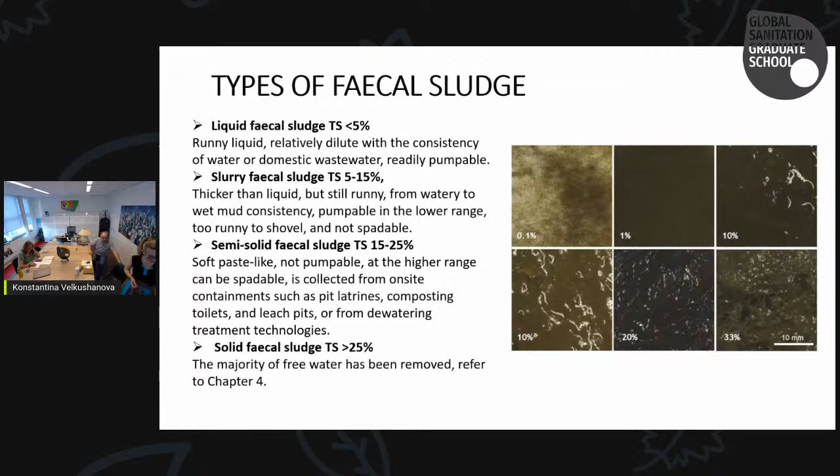We already discussed some factors influencing the characteristics of fecal sludge along the entire sanitation service chain. For example, the inputs going into the on-site sanitation influence the characteristics or composition of the fecal sludge that accumulates over time - we have excreta, anal cleansing materials, or miscellaneous materials like solid waste, additives, or other cover materials.

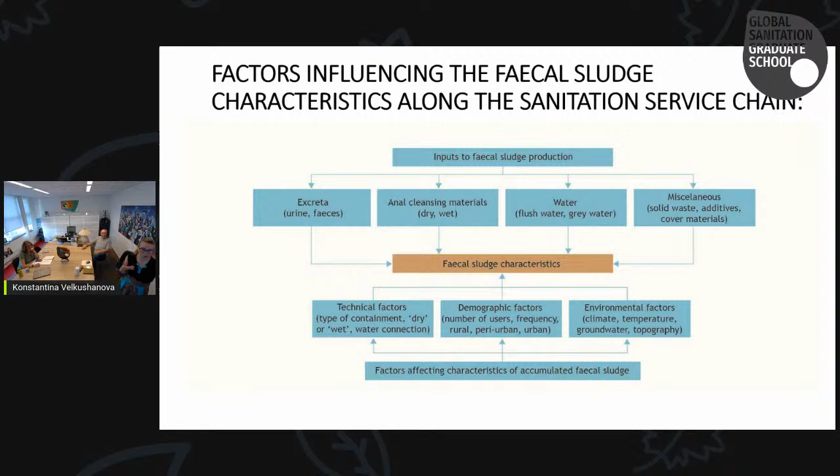Along with this, we have other factors influencing the characteristics, such as the type of containment - whether it's a dry or flushing system - the demographics, how many users use these systems, the frequency of use, and whether it's in a rural, peri-urban, or urban setting. And of course, we have environmental factors, which could be climate, temperature, groundwater, topography, or other related environmental factors.

We have dry pit latrines, wet pit latrines, community ablution blocks, urine diversion toilets, school toilets, or unimproved pits. The variation represents not only the type of on-site sanitation, but also the sampling points from different layers of the accumulated sludge. This shows how important it is to unify the methods we follow to characterize fecal sludge, because it's a highly heterogeneous material, unlike more homogeneous materials such as wastewater.

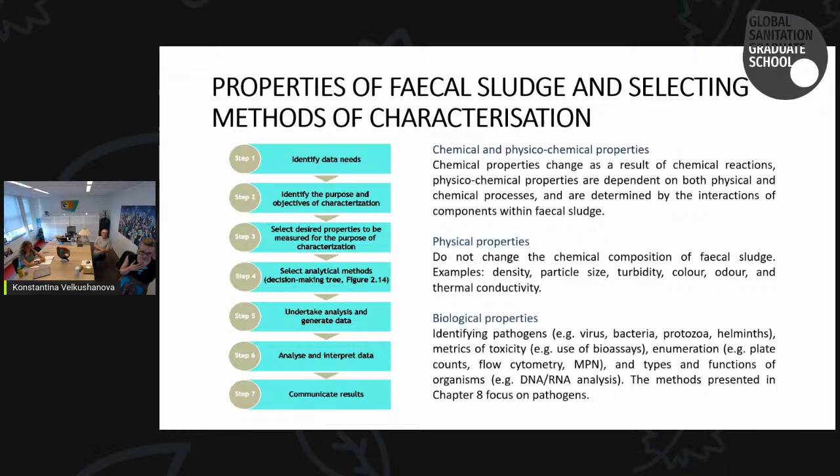In this book, we provided 3 main groups of properties for fecal sludge: chemical and physical-chemical properties, physical properties, and biological properties. In chapter 2, we included the setting up of laboratories for fecal sludge analysis, focusing on case studies from fecal sludge laboratories around the globe with different partners, covering personnel, training, availability of good facilities, types of samples, health and safety aspects, equipment, and reporting.

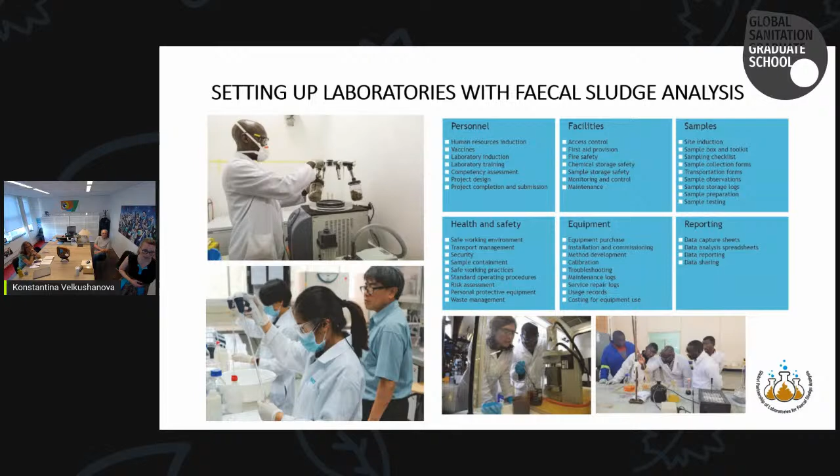Speaking of laboratories, I'll quickly go through chapter 8, which is the largest chapter and includes all the different methods we managed to summarize. There was a long list of authors and an even longer list of contributors and reviewers.

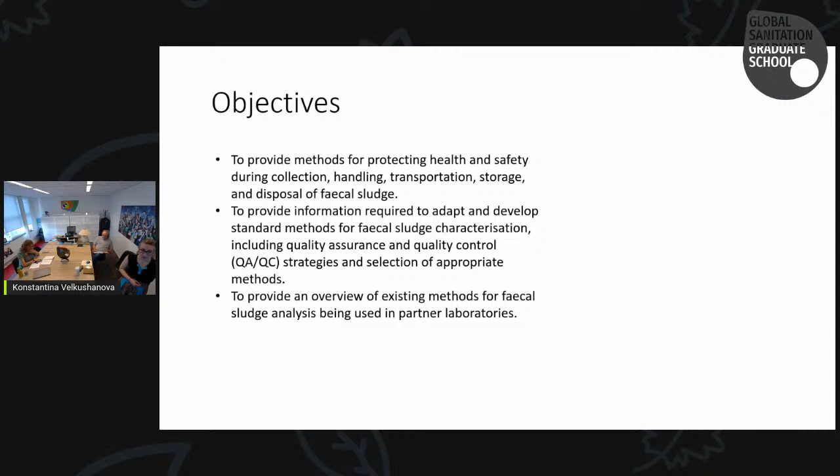The objectives of this chapter were to provide methods for protecting health and safety during collection, handling, transportation, storage, and disposal of fecal sludge; to provide information required to adapt and develop standard methods for fecal sludge characterization, including quality assurance and quality control strategies and selection of appropriate methods; and to provide an overview of existing methods for fecal sludge analysis used in partner laboratories.

The content in this chapter includes different aspects. I'll show you the methods included, but we also covered health and safety aspects, such as standard operating procedures, what personal protective equipment is needed, vaccinations and inoculations when working with fecal sludge in laboratories, clean and dirty working areas for preparation and analysis, and how to handle the fecal sludge.

We also have a quality assurance and quality control section, covering the chain of command, the importance of equipment maintenance and calibration, checking compliance, and the difference between accuracy and precision. We also address fecal sludge storage and preservation, how to safely dispose of samples and chemicals after analysis, and different sample preparation techniques depending on the type of fecal sludge.

For the methods, we currently have 49 included, distributed between the 3 groups already shown. These methods are modified from standard methods used in wastewater, water, and soil science, and the level of modification is indicated in each method with reference to the original. These methods are based on years of experience by the authors working with fecal sludge analysis in relevant laboratories, and the intention is to continuously upgrade and include new methods in future revisions of the book.

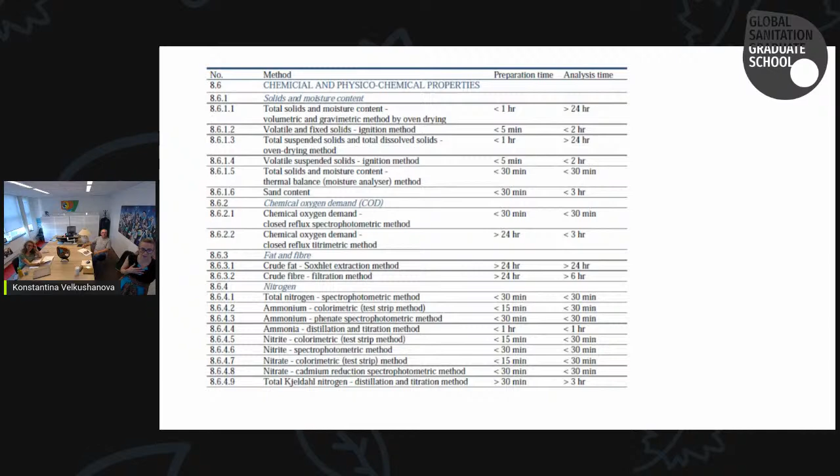This shows the different types of analysis methods included. The larger part is for chemical and physical-chemical properties: solids, chemical oxygen demand (COD), fat and fiber, nitrogen content, phosphorus, pH and electrical conductivity, elemental analysis, color, turbidity, settleability, and dewaterability. We also have some pathogen measurements.

Just to end, I want to say thank you to our site manager, Chris Buckley, who was a major contributor and dedicated his life to this field. So that's from me, thank you.

I would pass to Melinda. Thank you so much, Tina. I was really impressed that you could memorize all the chapters by heart. That shows true dedication, that's really fantastic.

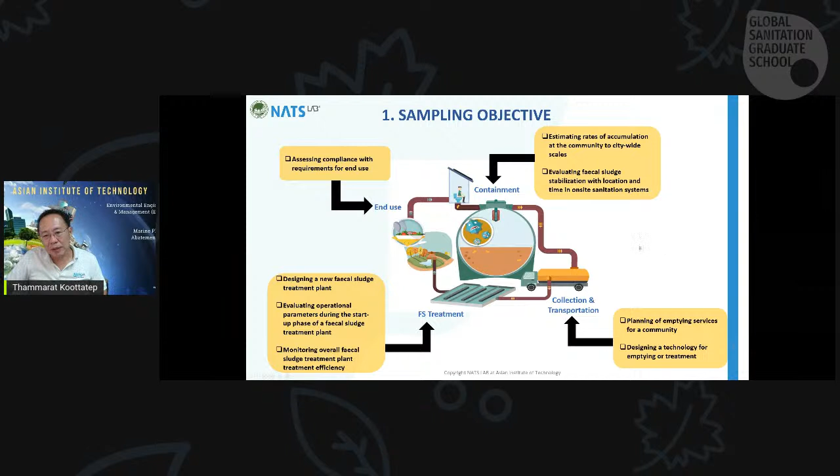We would like to define performance of the treatment system, evaluation of operational parameters, or monitoring of the treatment or reuse. So I think it's also very important to clearly define your objective first, before we get into the planning or the sampling program.

But of course, similar to water samples or environmental sampling techniques, grab samples can also be used for fecal sludge. As we know, the grab sample is a single sample or individual sample, which can provide a snapshot, because our system, starting from the container to the collection system to the treatment plant...

the characteristics could vary, as discussed by Tina earlier, so we need to prepare in advance how we should define things - whether we just want to know the snapshot or not, or whether we'd like to get representative samples along the time, along the flow, so that we can properly design the sampling plan.

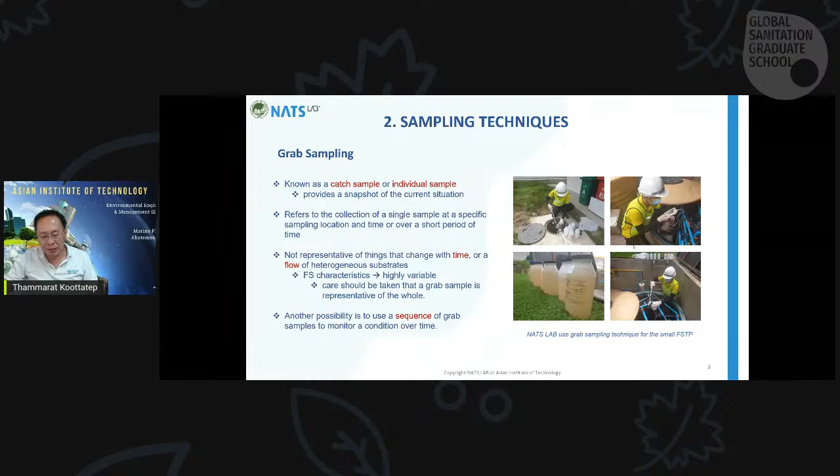Another possibility is that we can use a sequence of grab samples to monitor conditions over time, especially on the treatment system. Otherwise, sometimes we get a very high concentration, and at another time on the same day we get a really low concentration, so that's not really a good representative sample.

The other option that we would prefer or recommend for researchers or practitioners is that, if possible, we should be able to conduct composite sampling programs, which can provide more representative data and characterize conditions over a period of time.

As we know, it's not the same as the wastewater treatment system where we have a continuous flow of wastewater. Our fecal sludge is not like that. It's a kind of intermittent feeding, and we are not pumping out the fecal sludge from the containers every day. It's not constant at all.

So if you would like to understand better, the composite sample would be the recommended practice, depending on your convenience and time. Of course it would be good to have a couple of days to have the composite, but it takes time and too much effort. So in real life practice, we have to decide whether it should be within a few hours or a few days, depending on the local conditions.

The aliquot of composite samples need to be well mixed and minimize contamination during the process. That's quite important - how we ensure the well mixed, especially if you notice from the photo that it is a tank. The tank could have a scum layer, liquid layers, and also sediment layers. So how can we ensure that when you collect the sample, it is well mixed? Otherwise we will get only the scum part, or if we go down into the middle depth, it could be only the supernatant or liquid zones, which is not very high concentration. So this is something we have to plan in advance and think about what would happen in the reactors, the container, or the tank in the treatment system that we collect.

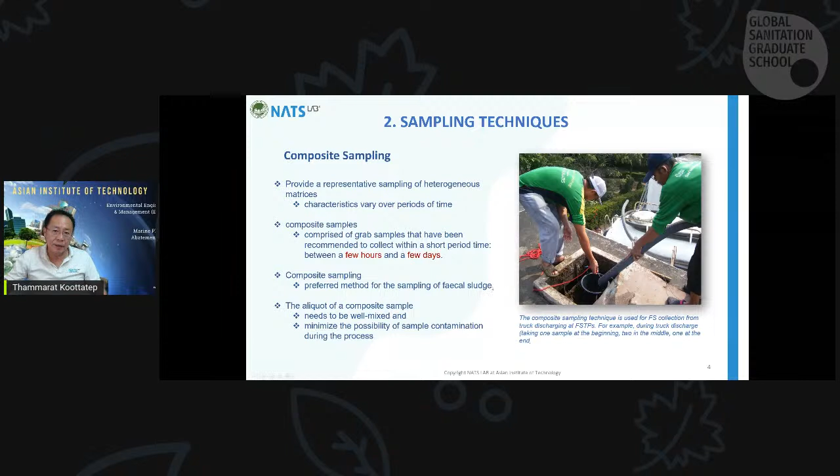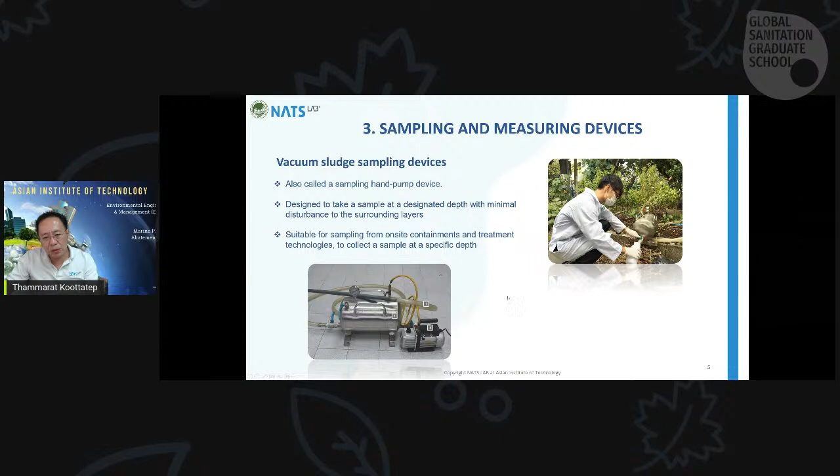From the device, we recommend certain devices that can overcome these kinds of issues. For example, the vacuum sampling device which we have developed simply uses a vacuum tank, and then we can define the depth that we would like to get, especially for reactor samples that we would like to get from the surface layer down to the sediment layers. If you would like to understand whether it is the scum, the liquid parts, or the sediment parts, this kind of sampling device can do it. But you can also think about what other equipment or devices we can use. This vacuum device is something we have used, and it can overcome several local issues.

Then there's in situ, on-site containment sampling. In situ sampling from the wet toilets, for example - how we can get the samples. As we know, fecal sludge can be very concentrated or very diluted, depending on the structures, design, or operational functions of the system - whether it's a septic tank, cesspit, cesspool, whether it's well maintained, or connected to a drain or a soak pit. Where should we go to get the sample?

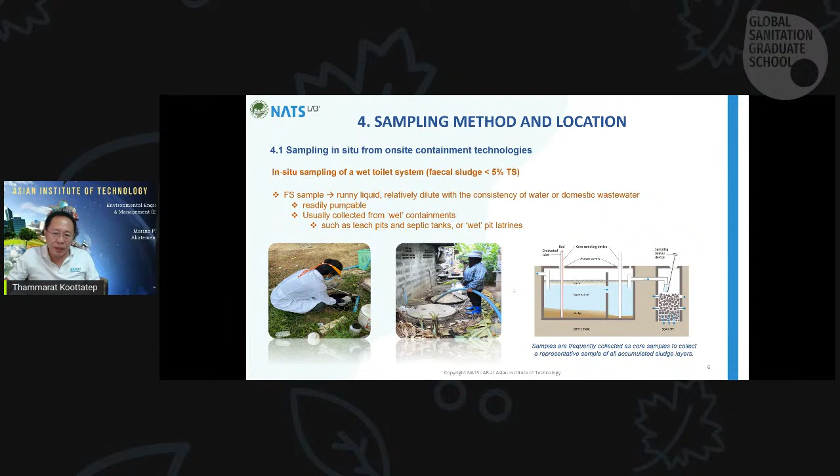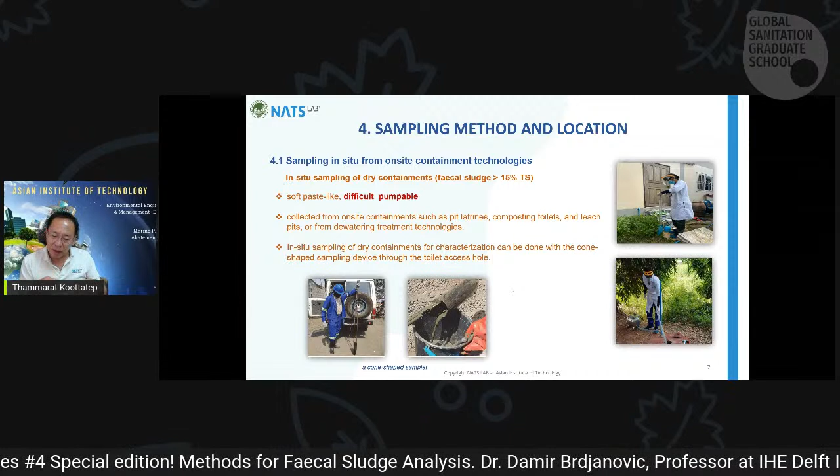This is something we need to think carefully about. If you would like to get the treated supernatant from the septic tank, for example, it could be rather simple - we can collect from the wet containments, like from this photo. But if it is higher than 15% total solids, meaning it has gone a really long time without any emptying of the on-site system or container, the solids could be very thick. Then it's not easy to pump out or collect by buckets. So we need to think carefully about how to get the appropriate sample, especially to avoid contamination from other sources.

This kind of in situ sampling, especially for dry containments, could be done using this cone-shaped sampling device. But we need to check first whether it is a very high or very low concentration fecal sludge sample - that's another challenge we need to check at the site. It may not be possible to just prepare the vacuum pump with the tank or use the cone shape. If you use the cone shape sampling device, it may not be possible to get a sample from very diluted fecal sludge, for example.

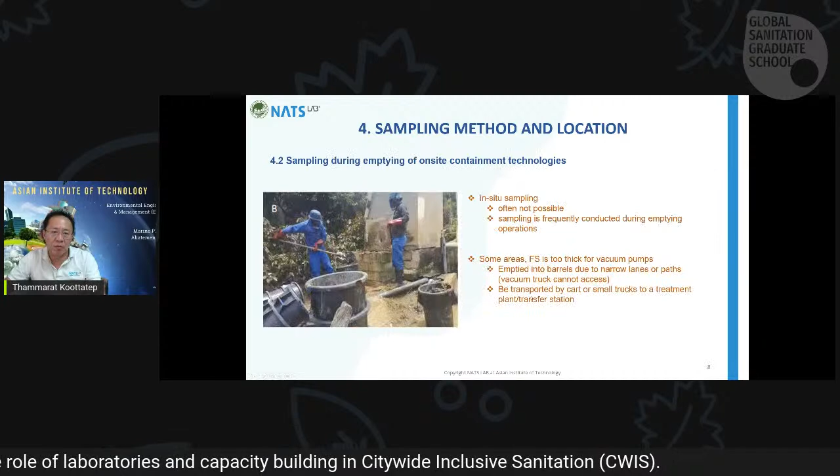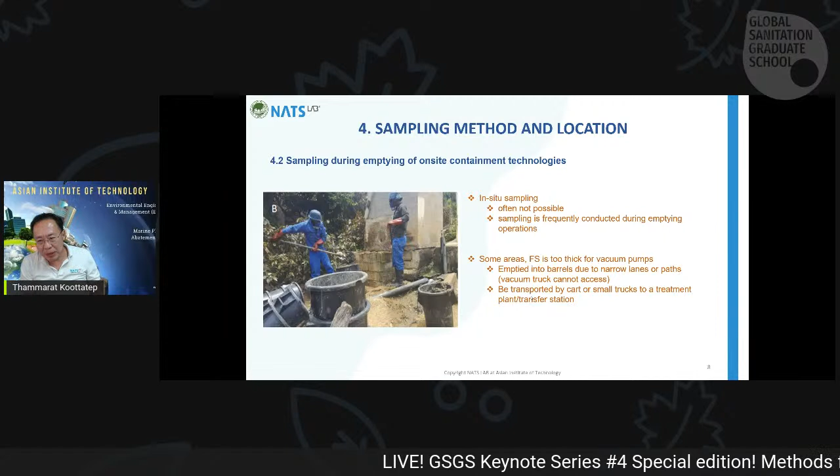This is something that will very much depend on the location and the system from which we would like to get the sample. In addition, many sampling situations, as you've seen in these photos, make it not possible at all - for example, wanting to know sludge quality in public toilets that have very high contamination with other solid waste like plastic bags or papers. How can we get to that?

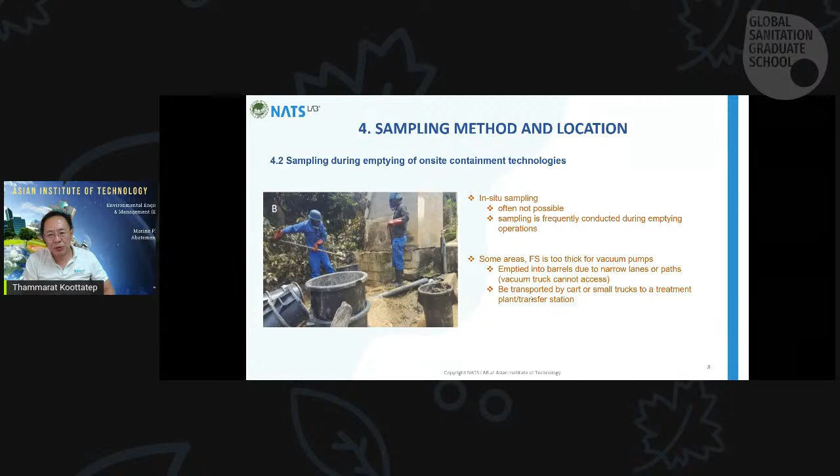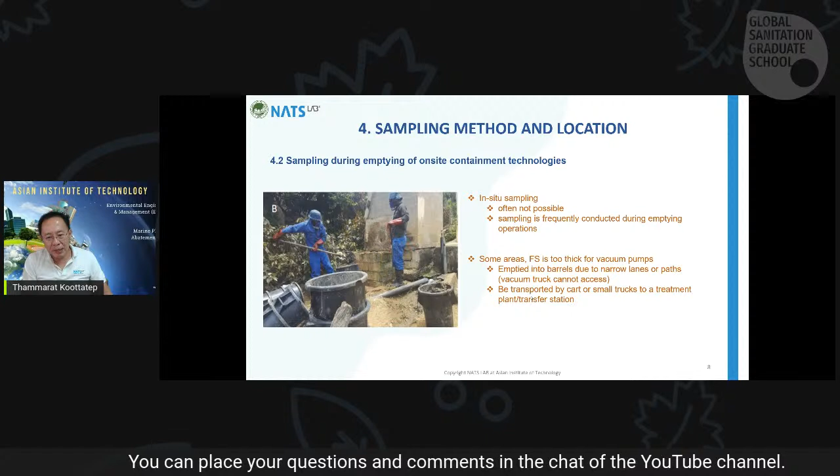This is something we may need to check - whether it's possible to do during the emptying services. During operation, we may not be able to use such devices or equipment. We may need to prepare in advance or ask the emptying service providers to come and empty it, so we can collect the sample accordingly. This would be a challenge depending on the system setup.

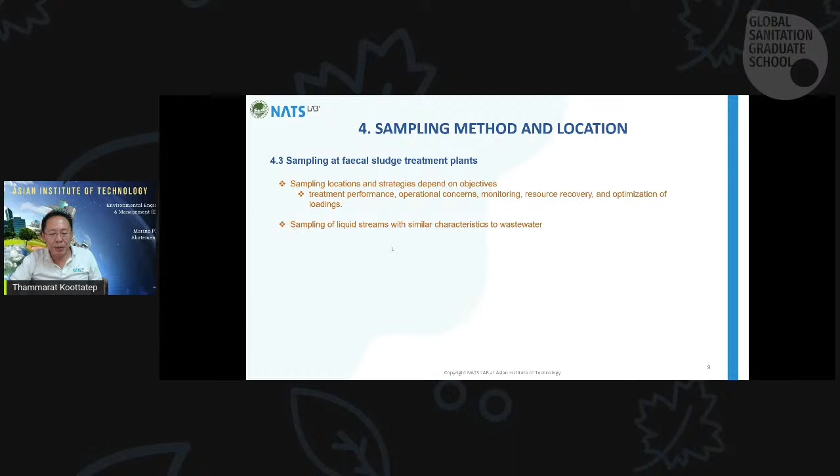At the treatment plant, it would be rather simple if we design properly - from inlet to outlet, to define the performance and operational concerns. This would be similar practice to what we did for wastewater, but we need to be aware of how to collect the appropriate sample, whether it's the sludge, the liquid, or the sediments out of the treatment system.

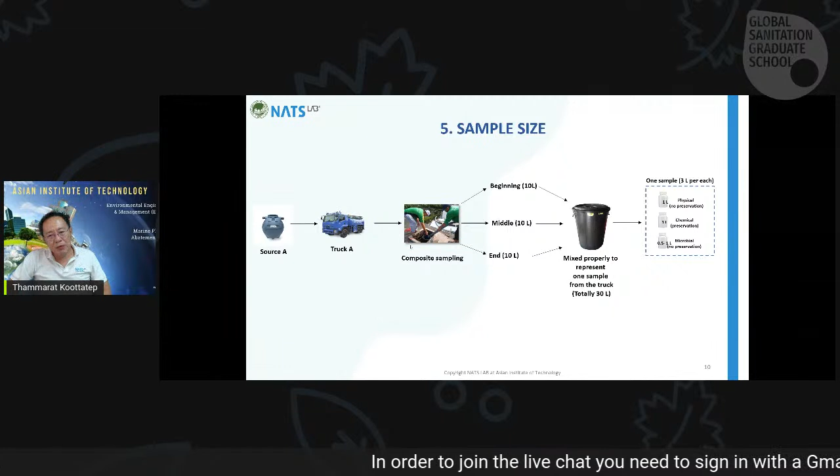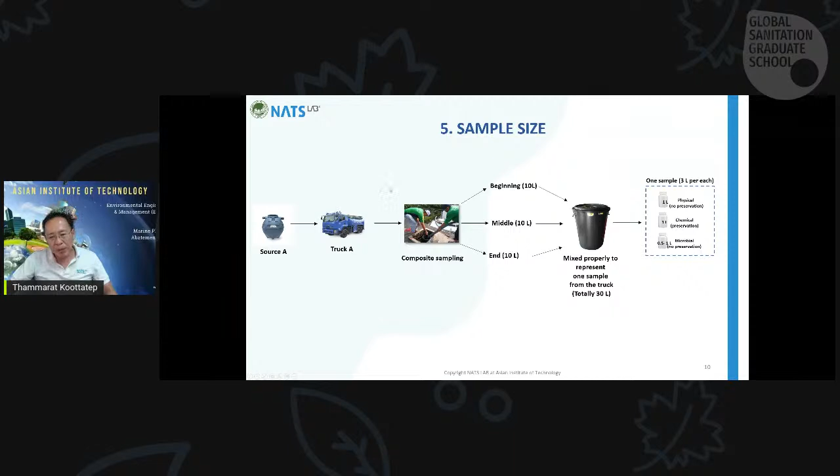Another question would be the appropriate sample size. We cannot standardize this yet, but we propose, for example, a composite sample could be a mixture of beginning, middle, and end, with 10 liters mixed properly. Then we can use each portion for different purposes - physical, chemical, or microbial parameters - with appropriate preservation. That's the proposal in our chapters.

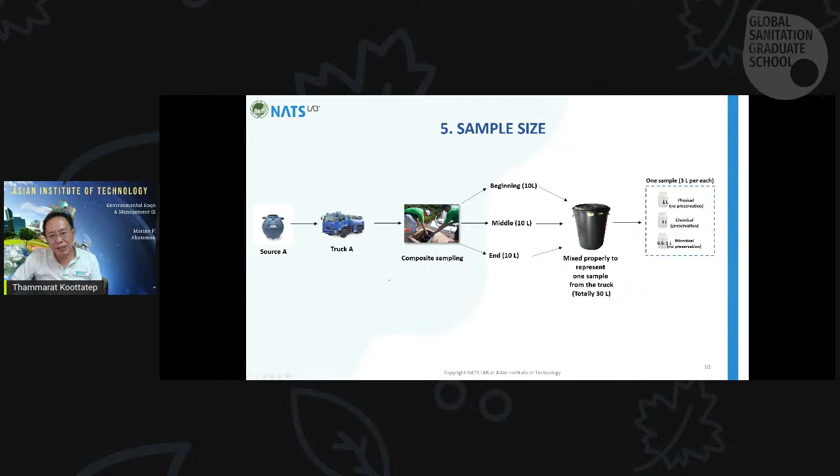Through further research in the future, reviewing and collecting more data, we can brainstorm whether these are the appropriate numbers or not. But based on our experience from AIT and our partner institutions, we propose this sample size that should be collected from the system.

From the dumping site, it could vary a lot because different trucks come from different sources - households, apartments, or public toilets - so the components or composition of each truck would be different. This is another thing we have to think about carefully - how can we ensure we collect the proper composite sample.

This practice could be possible, but to get samples from different trucks, before we decide the appropriate sample size, we may need to check whether it has the same source of fecal sludge coming to the dump site or treatment plant or not, and then we can decide properly.

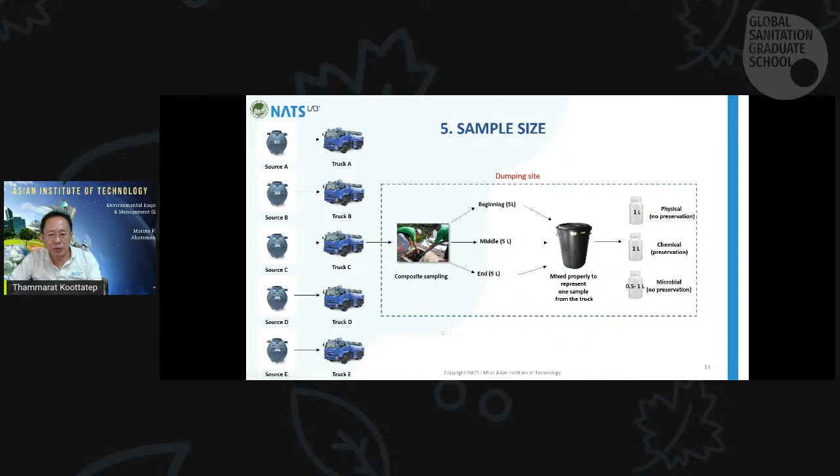We'll talk more in detail in another chapter, but during sample collection it's also very important to be aware of health and safety issues - protective equipment like shoes, masks, and gloves are very important. Also from the sample point of view, we need to prepare storage and preservation, and identify the samples and which parameters we're interested in analyzing.

This is an example of whether we should provide certain preservation agents into the samples or not, depending on what kind of parameter analysis is needed.

After that, storage and preservation is also required, because sometimes we cannot do the analysis right away, so we need storage. We suggest the sample should be maintained at about 4 degrees Celsius in refrigerators with constant temperature.

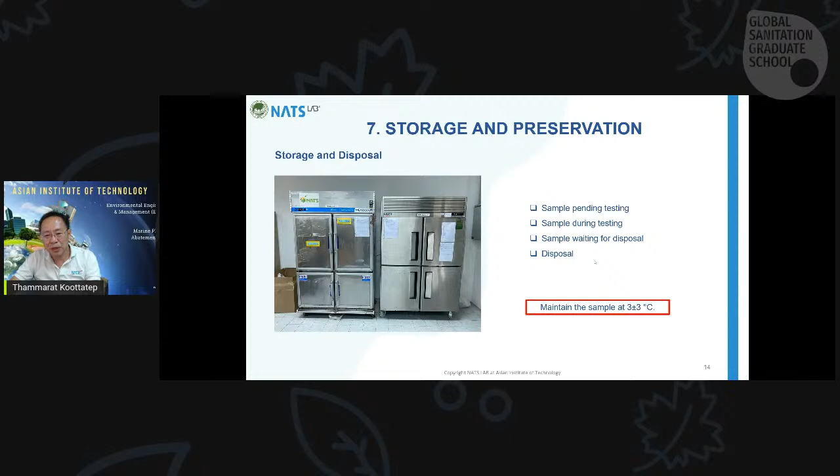Samples could be separated into categories - pending for testing, during testing, waiting for disposal, or disposal. The disposal of remaining samples is also very important. We should not be the ones disposing untreated fecal sludge into the drain from our labs, which is not good at all, and we need to prepare for this in advance.

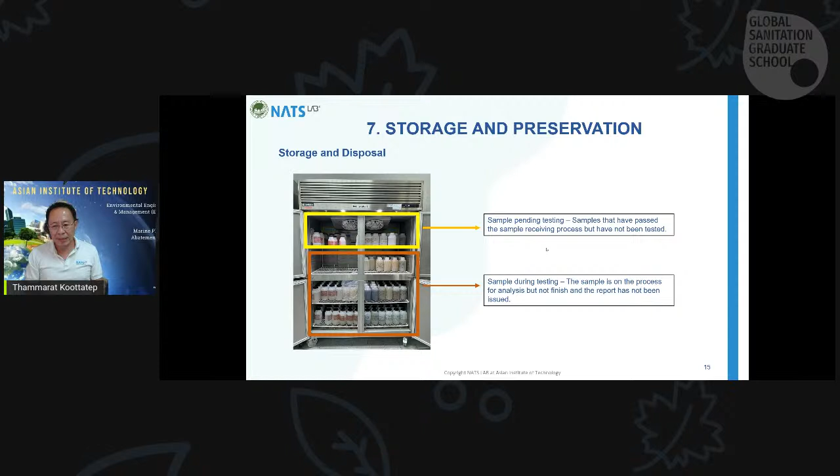This is an example from our AIT labs, in our NATS lab. We have to separate the shelf in the refrigerator, so there's an area for samples pending testing or during testing, which could be different. It should also have records, so we need to record properly in the forms. Otherwise, we may not be able to trace back the records of the sample bottles, and from which area the sample came.

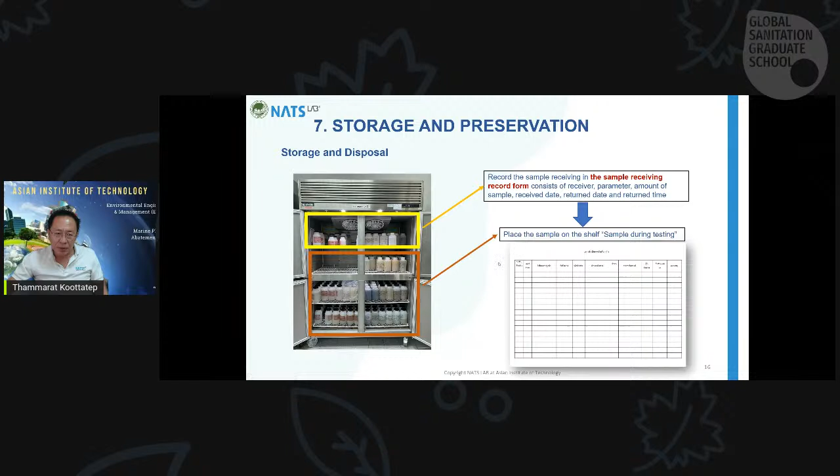In the ISO standard, there are requirements that you have to specify carefully how we manage sample testing and analysis. The storage and disposal is also very important, because before you dispose of samples, you may not be able to just drain them into the drainage. That would not be good at all.

So we have to collect the unused samples before we dispose of them, because sometimes we find out there are errors during analysis. This kind of sample may need repeat analysis to ensure we are not making big mistakes, otherwise we may fail the report. It's also very important to have a standardized disposal period before we can dispose of them.

In our system at AIT in NATS Lab, we luckily have a constructed wetland system as a disposal site for our samples. But of course, we have to report how we did it, how much sample, how many samples, and put the record according to the ISO 17025 standards to verify our workflow.

I'd like to share a bit about our labs. This year our NATS lab has certified parameters—6 parameters—making us one of the very first labs in the region that can analyze up to the level of sludge concentrations. Normally other labs providing service in our country and the region work in the range of water and wastewater concentrations.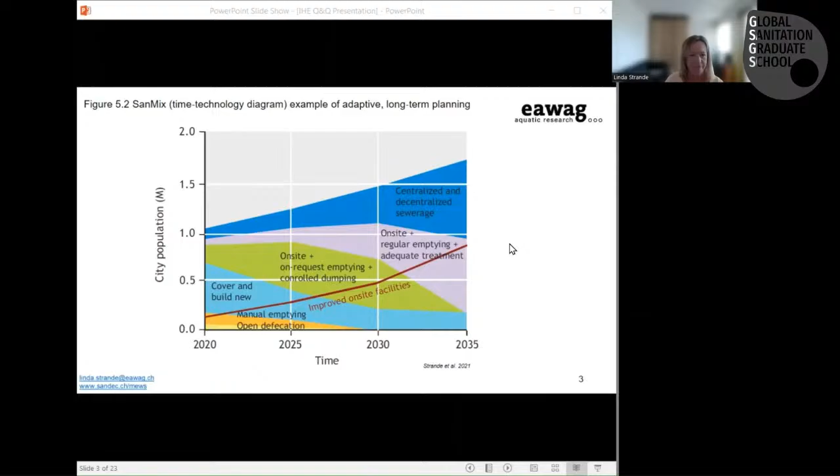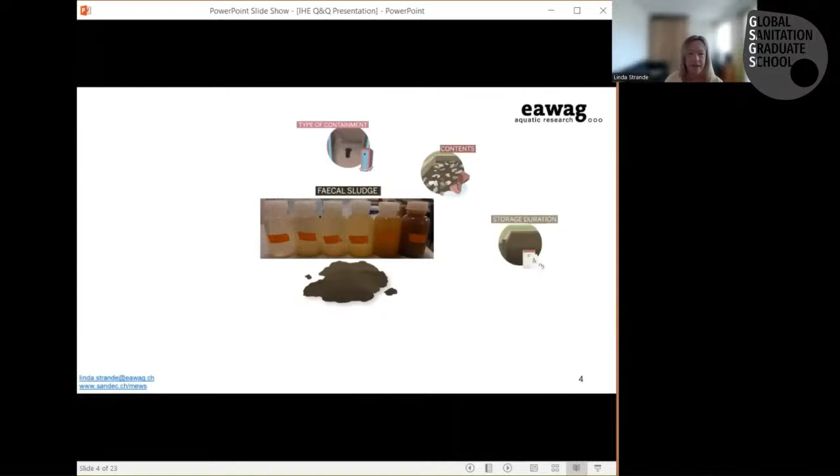So based on our field experience and research, we knew there must be a better way. Both quantities and qualities of fecal sludge are highly variable, and all of these management practices influence this, from type of containment, contents, storage duration, emptying practices, level of on-site treatment, quality of construction, groundwater, and temperature.

So let's first consider quantification. It is important to realize that volumes of excreta produced per capita per day are not equal to what actually accumulates in on-site containments or what will be delivered to treatment facilities. Represented here are steps in the service chain.

Number one is excreta production. Number two is fecal sludge production, which is everything going into the containment, such as excreta, flush water, cleansing materials, kitchen waste, or rubbish. Number three is fecal sludge accumulation, the results of production minus biological degradation and outflows.

Number four is fecal sludge emptied but not collected, which also includes septic tank effluent if it is discharged to the environment. Number five is fecal sludge collected but not delivered to treatment. And number six is fecal sludge collected, which is delivered to legal discharge and treatment.

Actual in situ rates of fecal sludge accumulation are the most difficult to estimate, but the most important for long-term planning of citywide sanitation.

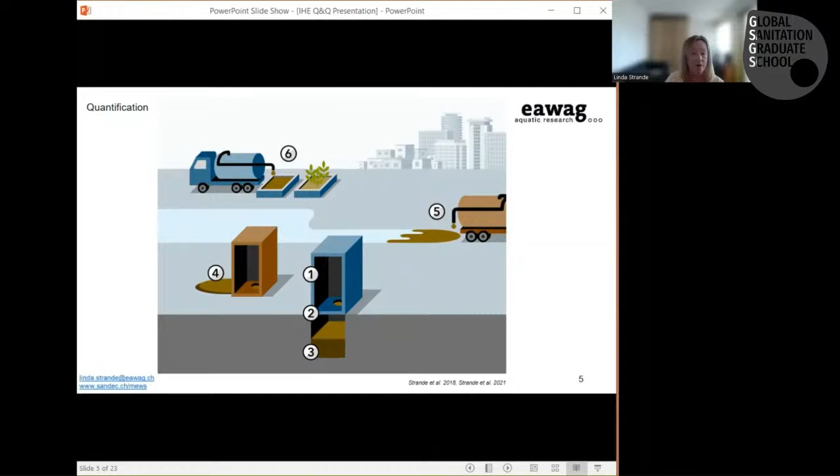So how can we measure these underground volumes of accumulated fecal sludge? For individual containments, one way could be to measure volumes emptied by vacuum trucks or the VOLaser measuring device, which has been developed by the MEWS group, and then divide by the time since last emptied. More information on the methods can be found on our webpage and also in the sampling chapter.

So let's next consider qualities. Say you are designing a planned treatment facility and so need to predict characteristics of fecal sludge that will arrive at the facility. In addition to the different management practices which influence the variability of fecal sludge at the level of individual containments, it is emptied and collected batchwise.

What I mean by this is if the top figure represents a centralized sewer-based system, the wastewater from individual houses that is transported through the sewer is relatively homogenized during transport, and hence it is easier to predict and model what arrives at treatment. In comparison, if the bottom schematic is fecal sludge, it is much more variable at the level of individual containment, and this level of variability is delivered to treatment as it is not homogenized during transport.

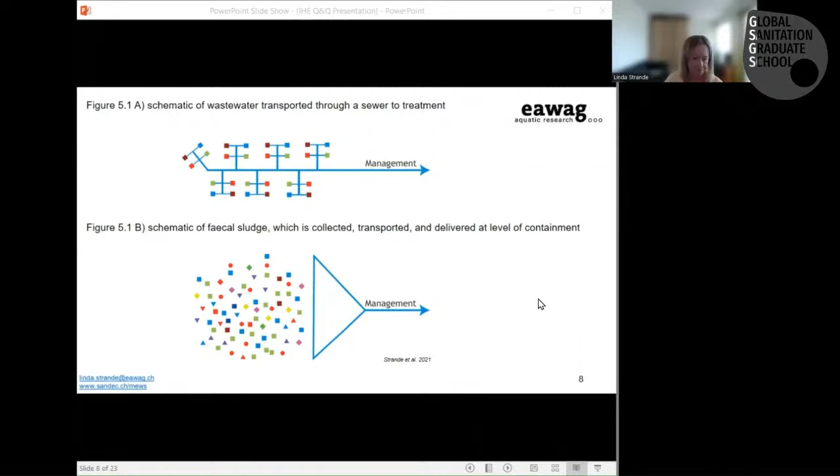One problem with making predictions is that qualities of fecal sludge typically do not follow a normal distribution, and so average and standard deviations alone do not provide adequate representative summary statistics.

The figure on the left compares influent at the Lubigi treatment plant in Kampala, Uganda, of wastewater in blue and fecal sludge in red. The figure on the right compares values reported in the literature for wastewater in red and fecal sludge in all other colors.

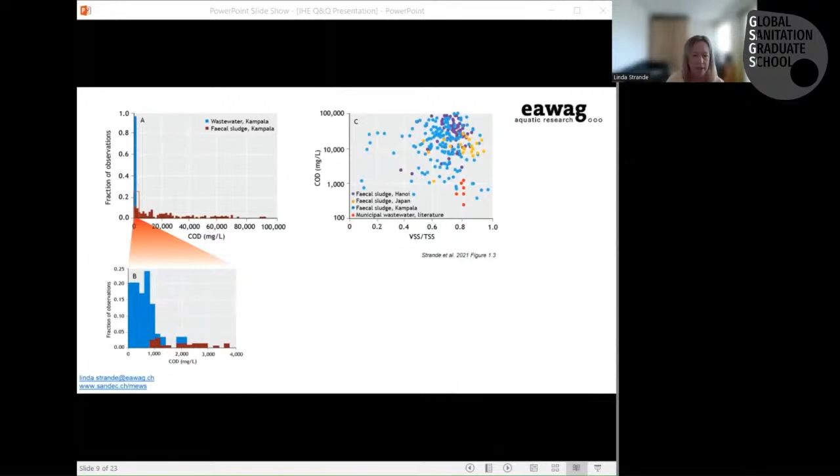You can see the distribution of reported characteristics is much different for wastewater and fecal sludge, which also holds for quantities. A common mistake is assuming a normal distribution, but the problem with this assumption is, for example, with an average value of 10 and a standard deviation of 25, about a third of randomly sampled values would have negative values. This is clearly not meaningful for concentrations of constituents in fecal sludge, such as total solids, volatile solids, or COD.

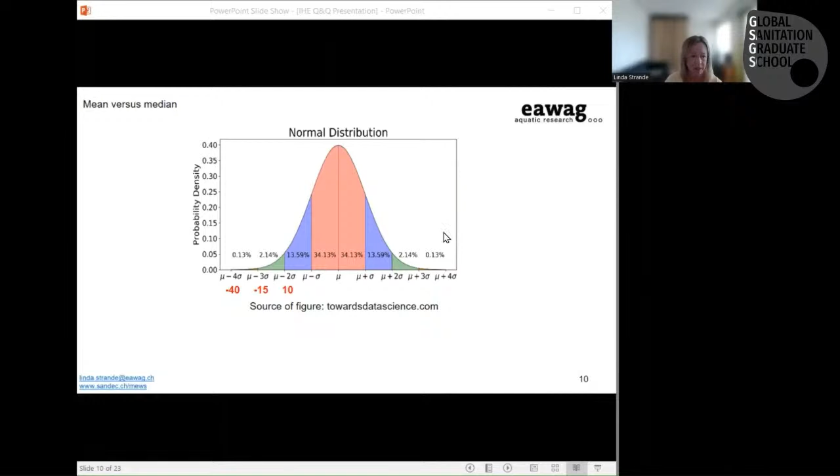Taking an example from the literature, 108 fecal sludge samples taken in Ouagadougou, Burkina Faso, had a reported mean value of 9,014 milligrams TSS per liter, with a standard deviation of 8,480. If these results followed a normal distribution, it would mean that the probability of a random sample having a negative value would be 14.4%. That means a statistical model would predict that about 15 out of 100 samples will have negative TSS values. Clearly it's not logical to report the data and try to make projections this way. So different summary statistics are needed.

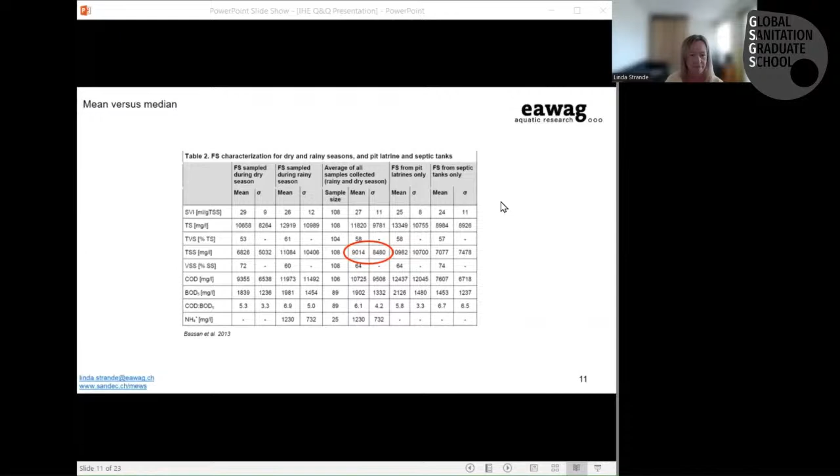So we have these diverse volumes and characteristics. How can we use them to make reasonable projections? If we just make a citywide average, we know it will not be meaningful, as explained by the assumptions of averages being based on a normal distribution.

So the question we asked is, can we use statistics to find categories of data that predict or separate out different ranges of characteristics and accumulation rates in order to average out this complexity and make reasonable projections?

For example, what if fecal sludge from households always had a higher total solids? Or if septic tanks always had a lower total solids? Or if public toilets also had higher ammonia concentrations? That is the crux of our approach.

Based on our experience, quantities and qualities of fecal sludge can be grouped by categories of demographic, environmental, and technical data. This example is from Kampala, Uganda, where we separated results from 180 on-site containments and separated them statistically by the types of demographic, environmental, and technical data written here.

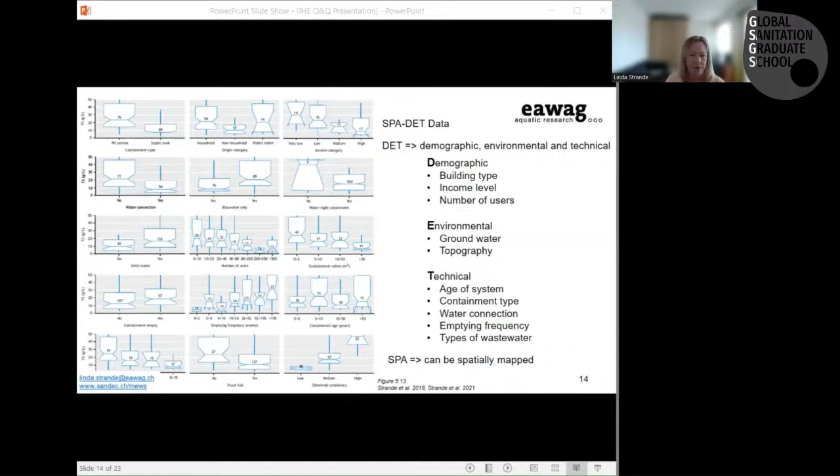So what are the notches around the median? To account for the non-normal distribution of data, we use the confidence interval around the median, not the mean. In this way, we can separate out categories of data to use when making weighted averages, for example, high and low income level, or septic tank and pit latrine.

So we then use these values to make a weighted average for the city versus a global average. An example of applying this approach: if the accumulation rates for a city served by septic tanks and VIP dry latrines were 25 liters per capita a year and 190 liters per capita a year, with 1 million people using pit latrines and 100,000 people using septic tanks, just taking a simple average of the two accumulation rates would yield 107 liters per capita a year, whereas taking the weighted average for the entire city would yield 40 liters per capita a year.

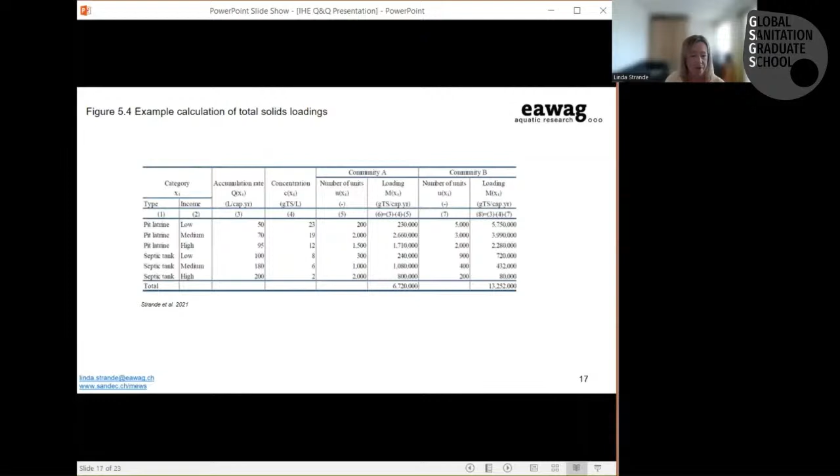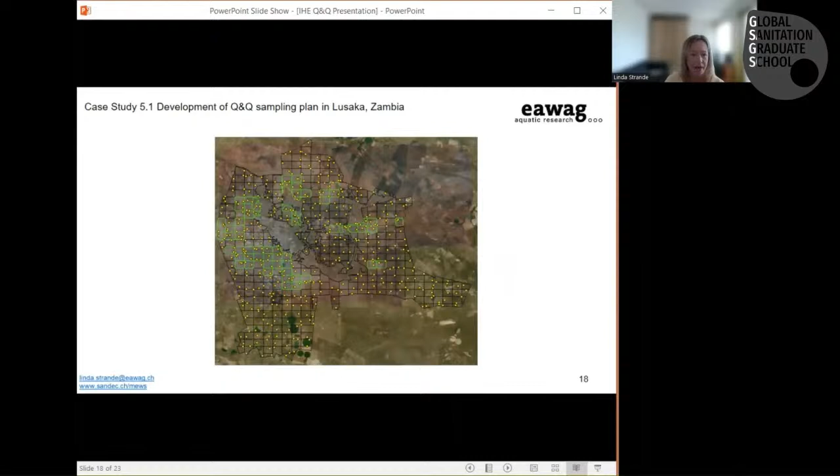Also in the book chapter is this case study from Lusaka, an example of how to design a sampling plan. This case study from the book chapter presents a case study from Hanoi and Kampala, where we evaluated whether a modeling approach could be valid within a whole city and also across two different cities. This case study was from Sircilla, India, with an analysis of 180 on-site containments, demonstrating the difficulties we are still facing in standardizing field measurements and the impact on results, whether settled sludge or total sludge volumes are measured, or in situ or truck methods are used.

Further examples on our website and in the book chapter about how data collected in this fashion could be used to reduce costs of characterization campaigns, such as relations seen between different characteristics, or our Sludge Snap app, which is being developed to predict characteristics based on photos taken with a smartphone.

If you want to experiment yourself with these types of data analysis, please see our open access data for more examples. At these links are data from 850 on-site containments from 6 different cities in Africa and Asia, with more open access data coming soon. Please contact us if you have any questions.

This chapter is organized to show you that there are different types of scales of experimental methods. You start at the lab scale, which goes from milliliters up to liters. You take a very small research question and see what range you need, maybe how much chemicals to add, or how many temperature differences to apply, to get a feeling for how your fecal sludge reacts to different stimulants.

Once you feel certain with your findings in the lab scale, you want to see how it's doing in real life conditions, so you move up to the pilot scale. There's a very nice picture here from the book showing a pilot scale facility, and what that offers you is real life conditions.

You have the variety of the fecal sludge coming in, the weather conditions, and you know what it's like to actually work there in the field under the same conditions. You're also able to take into account viscosity issues, pumping issues, and how to get it from one tank to the next, so you get a feeling for how things will react at a bigger scale.

Once you're ready with your experiments at this scale, you're ready to try it out in full. A full scale, of course, is not so suitable for any kind of novel experimenting, but it is very suitable to see what you can change at a bigger scale once you're quite certain of a particular improvement.

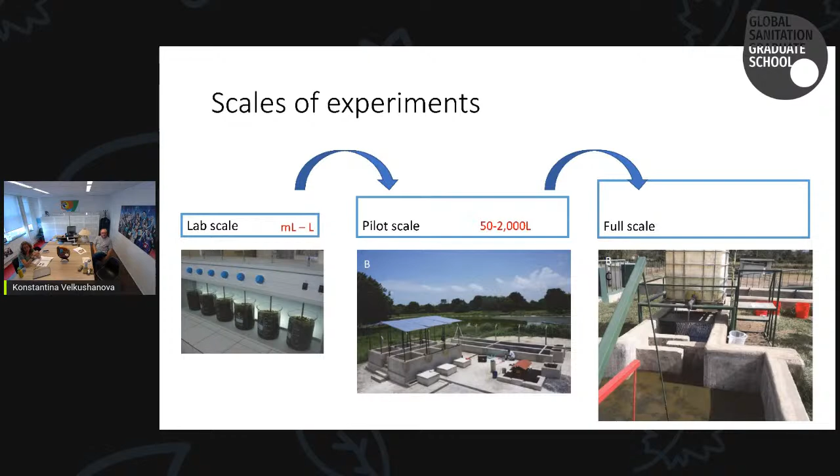What this chapter presents very nicely is the 10-step approach: how do you get from something you're wondering about in the field to actually finding a solution for your problem or a nice improvement? The chapter takes you through these 10 steps.

The first and very important step is to get a research idea. Typically that's something that hits you in an unexpected place, when you're biking home or doing the laundry, and you think, what I was wondering, how could this be the case? Why is it not in better shape? Or could this be related to this characteristic? This is a very important one.

Once you have this idea, to get that tested you need to make a specific research question. So how do you cut down all the side issues and really get down to a research question? It's a very difficult step. All you master's and PhD students know how difficult it is to narrow it down to one specific research question.

But once you have that, what you want to do is select the variables to measure, so which parameters are of interest for your research question. Then you identify the design factors and see in which ranges you're going to test. If you're interested in a temperature change, you're not going to do it from 0 to 100.

That doesn't make sense because you need to apply it later on to a full scale, so you want to narrow it down to the range that makes sense for you when you start to apply it at full scale.

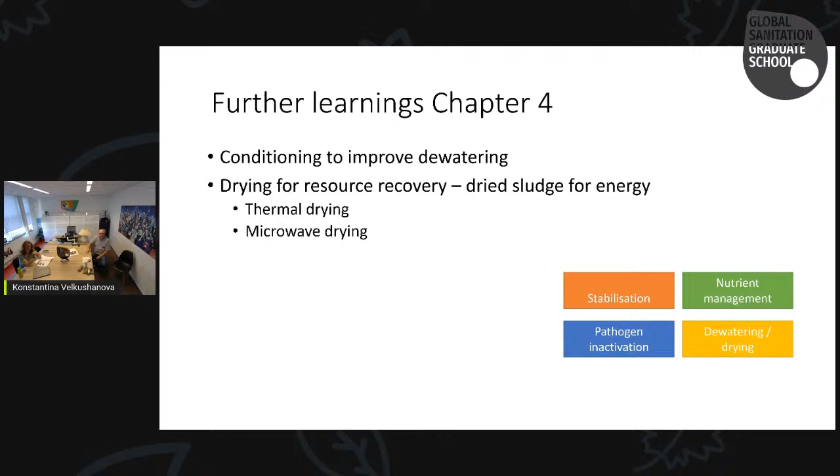Okay, now that's what I wanted to share with you today about chapter number 4. Make sure you give it a nice read, because it's a lot of interesting information, and especially when you're ready to do some experimental work, it also gives you encouragement that you started a small idea which can grow out into a real treatment plant. So be brave and get ready.

Now with this, I'd like to give the floor to the modeling, because that's an aspect we haven't touched yet. We have seen some questions about this in the chat already. Modeling gives you a nice opportunity to get some idea about findings without having to go into the laboratory, but it does give you a need for very good data. So, Damir, take us into your computer, please.

Thank you, Mariska. So this is a chapter which is a little bit different than other chapters in the book. The other chapters are very practical, based on hands-on experience of many people, and help readers apply what is in these chapters directly into practice. We decided to have a little bit of a challenging chapter in terms of the focus and the applicability at this moment, and it's a conceptual chapter.

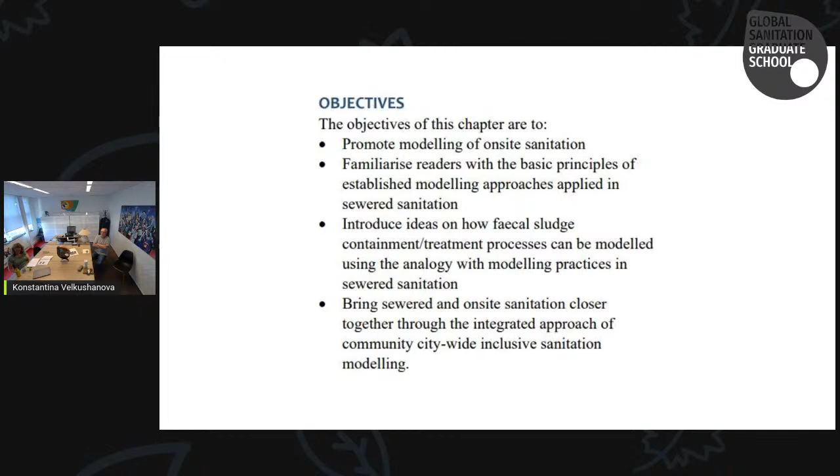So we have 30, 40 years of experience in modeling sewer systems, but zero or little experience modeling non-sewered sanitation and related off-site treatment technologies. The purpose of this chapter is to bring these two fields together, to learn from the experience of colleagues and modelers of sewered systems, and to see how we can transfer that knowledge into the non-sewered area, making interfaces so the two fields are better connected and end up as one bigger integrated system, which is the idea of citywide inclusive sanitation in the first place.

So these are the learning objectives.

On the next slide, I'll introduce you to some quick literature on the wastewater side. The most common literature used is on activated sludge models, ASM1, ASM2, ASM3, and so on, for activated sludge modeling. For anaerobic digestion modeling, the most common model is ADM1, Anaerobic Digestion Model number 1. In current practice, these models are integrated into what we call plant-wide modeling of wastewater treatment plants.

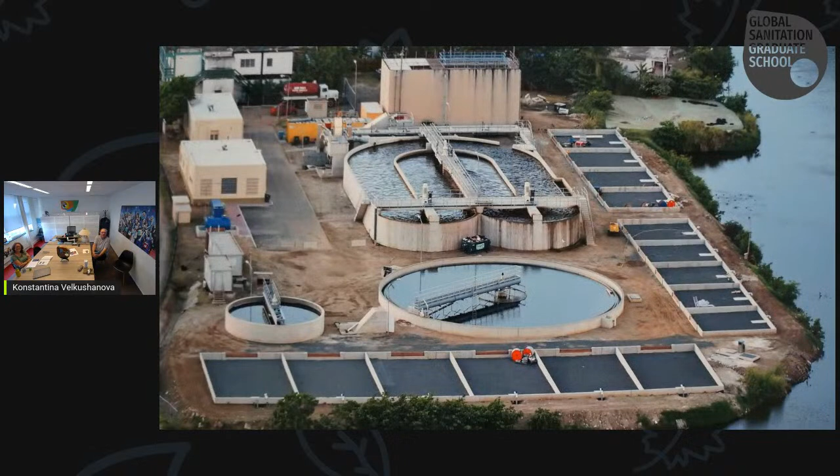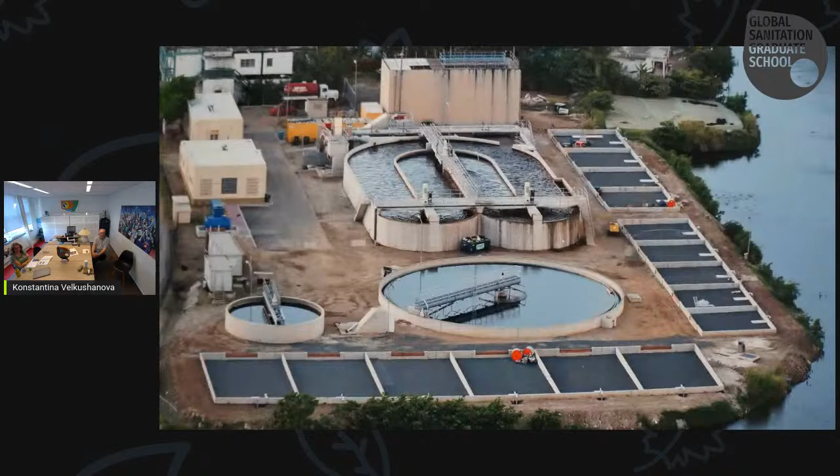This is an example of a treatment plant in St. Martin that we also use in our sanitary engineering program. This is just a nice wastewater treatment plant. And next, you will see the process flow diagram.

This is a normal process flow diagram, and on the next slide you can see how it is transferred into a modeling environment. We have simulators which contain models, and this is a BioWin simulator representing this little treatment plant that I just showed you.

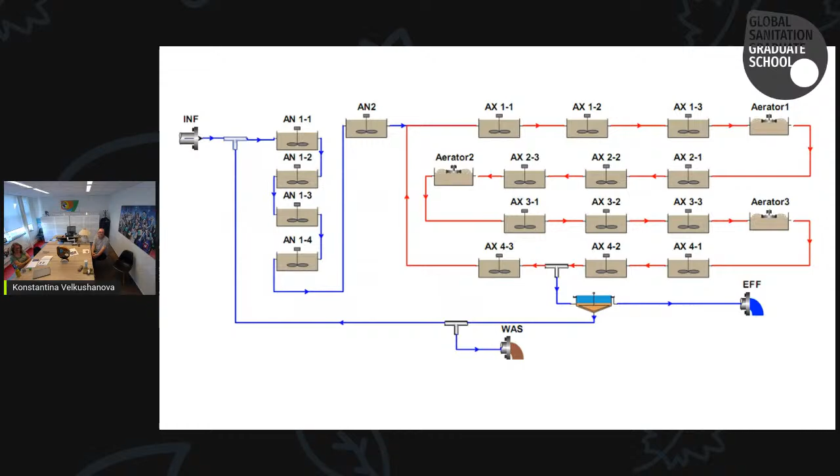So now we are very happy with ourselves and with everybody in the sewered part of the city-wide inclusive sanitation. That's really going on, and you have more and more developments, even more accurate academic models and integrated models, plant-wide models. We model now incredible things.

But I must say that one part we still don't model correctly in sewered sanitation, or maybe not sufficiently. The sewered sanitation is focused really on carbon, nitrogen, phosphorus removal, and even the removal of advanced compounds, micropollutants, and so on, but not on pathogen removal. And this is about environmental protection, but sanitation is about pathogen removal in the first place.

And that is a chance where I see the non-sewered sanitation modeling can really take a lead, so that sewered modelers can learn from the non-sewered people and vice versa.

So let's start now talking about non-sewered sanitation, why we should do modeling of non-sewered sanitation. But first, by application of models, we learn to be systematic, we learn to be fundamental, but also practical and organized. So the practical understanding is very important.

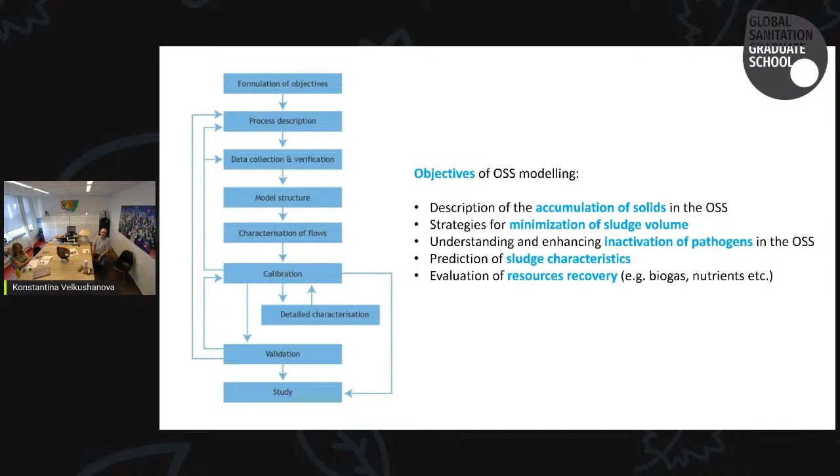So when we go to the first step, you really need to formulate the objectives. The objectives will indicate which type of models you need to use. So you really have to be clear from the beginning: why do you do modeling, what is the purpose of it, and what do I want to get out of it. Once you know that, you can continue, but don't continue without answering that first question.

In this particular case, in the book, we did not cover all types of on-site sanitation systems. We started with the three most common technologies: toilet containment, portable toilets, single pit latrines, and septic tanks.

For these three, we moved into a process description, and it was really important to understand what is happening in these systems. Once we understand what is happening, we can also describe it by means of mathematical equations, taking into account physical, chemical, and biochemical transformations, both in terms of time and space.

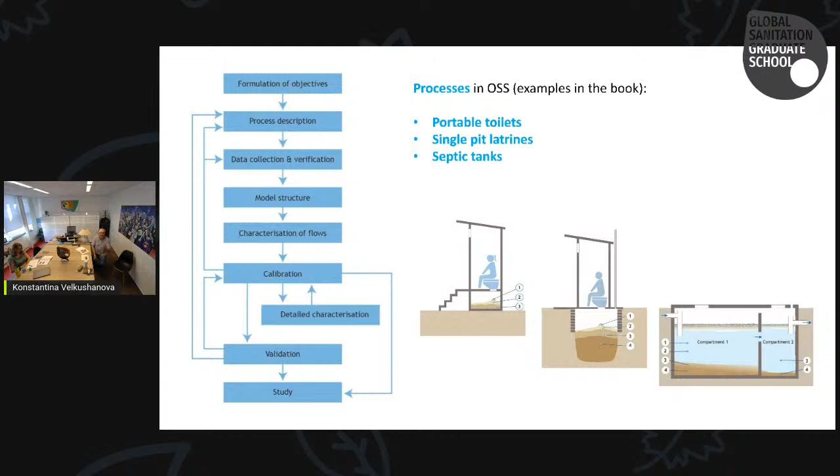Once the processes are described well, we need to collect the data and verify. For that, we use all the knowledge we have collected before in other chapters.

We need to determine the volumes of fecal sludge, including urine, and we need to determine the characteristics of fecal sludge, urine, and septic sludge.

What is important is that we have these zones in some of these technologies, and we have to define the depth and size of the zone, because these zones seem to be interconnected—one zone has an impact on the zone before and after.

Assessing the conversion processes is the core of understanding these systems. And of course, we need to estimate infiltration and percolation in the system, taking into account different types of containments.

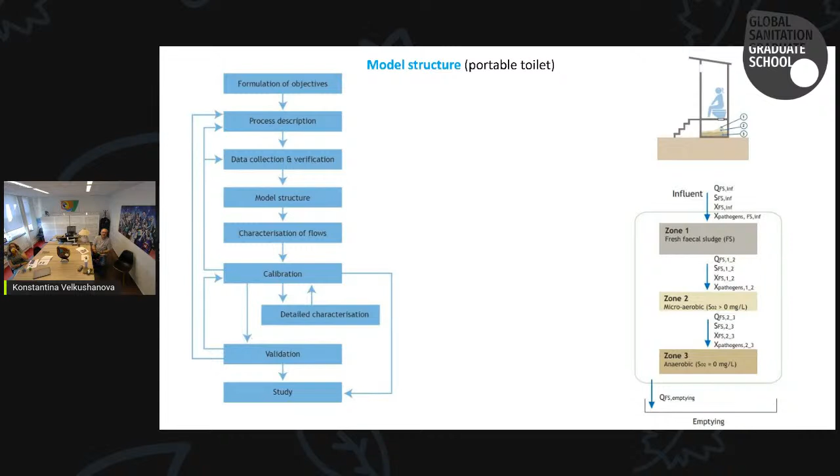In the next step, I will show you very quickly the proposed model structure for three different technologies. For a portable toilet, you see these different zones are modeled differently. In this case, we have three zones, connections between them, and processes happening that we describe. This is for the portable toilet, where the fecal sludge and urine are contained.

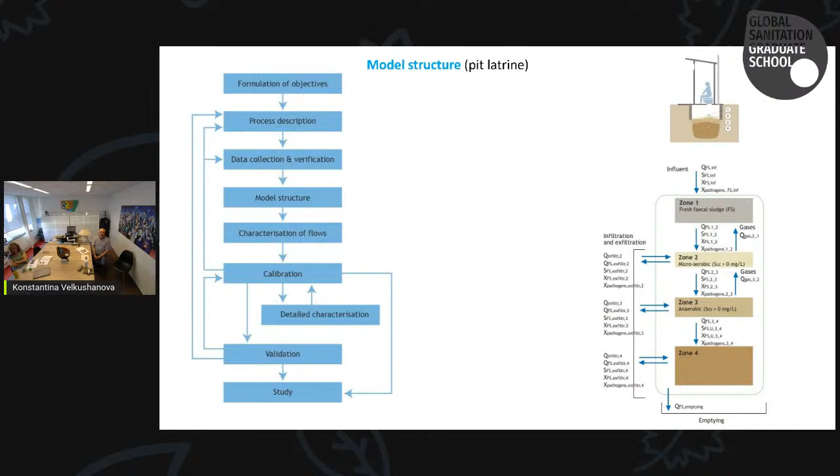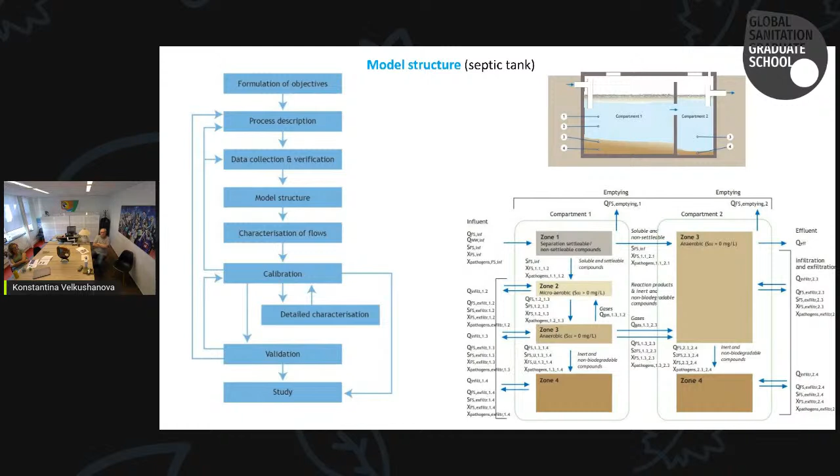And if the tanks are made permeable, you also have to take into account infiltration and exfiltration. These are suggested concepts that can be further developed to build proper models for these three containments.

After that, we go into characterization of flows. For that, we need to characterize fecal sludge and fractionate that sludge. Characterization means characterization in terms of quantitative and qualitative characteristics, and the book talks about both.

In the chapter that Linda presented, we talk about Q&Q methods and other methods to quantify qualities. In other chapters, we talk about fractionation of the sludge and specific characteristics of sludge.

But we should not forget inhibition and toxicity, because here we are talking about biological as well as chemical processes. These processes are influenced by different parameters like pH in a tank, the presence of volatile fatty acids, ammonia, or other environmental factors such as temperature present in the system.

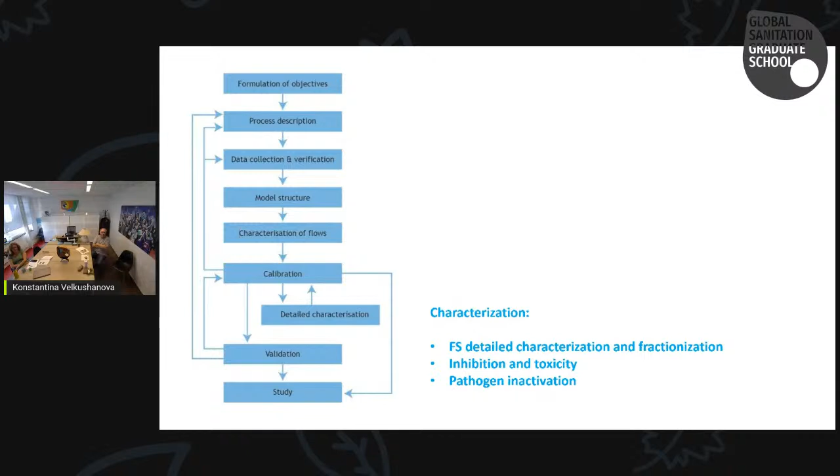This can inhibit or toxify our biological population in the containments and influence the results of the model. Also, pathogen inactivation is not included in the modeling of sewer systems, so we included pathogen inactivation in this chapter as well, along with several methods for modeling pathogens.

Moving from there, assuming we can apply such a concept to onsite sanitation systems, we come up with an approach where we look into life cycle analysis. This is the most appropriate approach to modeling when we look into the full life cycle of a certain technology, starting from system choice, through design, operation,

optimization, improving, and upgrades. At each of these different stages, you need to apply different models. At the beginning, the complexity of the models is low, but the impact on the technology choice is huge.

So when you really want to save money, you do it really at the beginning. When you really want to upgrade or optimize your treatment and to do more academic research, it's towards the end. But moving towards the end, the models become more complex and savings are less. So the maybe surprising message to you is, once you need to use the models, you can save the most money using very simple models at the beginning of your life cycle of your technology.

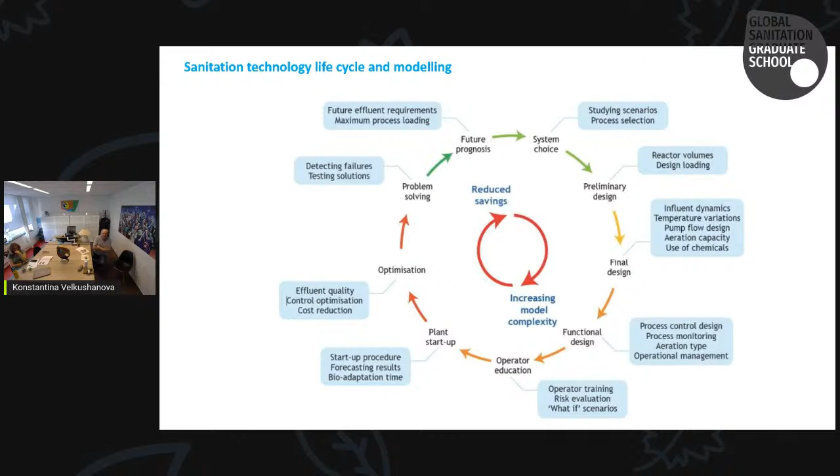Now, how does that fit into a bigger picture? So once we do modeling on a micro scale, we model individual toilets, septic tanks, latrines, and other technologies. We also propose in the chapter how to model other technologies, but we did not give conceptual solutions for that, because for many of these, modeling has already been done to a certain stage.

So we need to put that together and move from micro scale to macro scale, from the level of individual units to areas in a city, so that we could use this data and agglomerate it, extract what we need to model large scale areas, and apply another level of modeling which would deal with the selected information coming from the microscale models. So there we need to build an interface between microscale and macroscale to get the data from non-sewered sanitation, including fecal sludge management, to the same level so that this sector speaks the same language as the models coming from the sewered areas. And then we can put them together.

So on one hand, we have quantification of the flows and wastewater in the sewered area. On the other hand, we have quantification of the flows of fecal sludge and septic sludge in the non-sewered area, and then we can put it together. And then it would lead us to many exciting developments.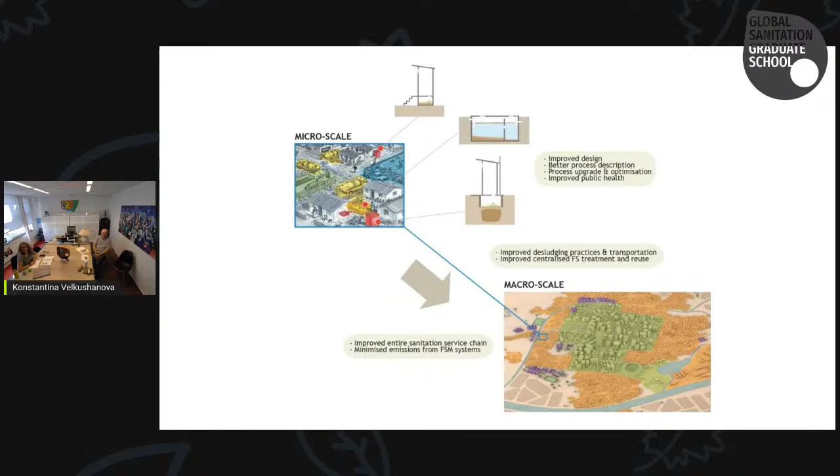I will just mention one that we developed during COVID. It was developed by IHE and the Watercycle Research Institute, KWR, in the Netherlands. We developed a concept called DEMOS, which is a digital epidemic observatory and management system, working on a citywide inclusive sanitation level, taking information on COVID from the sewer networks.

You have probably read a good deal of literature that came out in the last two years on sampling of sewage networks and modeling of COVID in sewage networks. So these are the type of things we can easily get from sewered areas.

But this is also an opportunity for non-sewered sanitation to provide similar information based on samples taken from toilets, transfer stations, and fecal or septic sludge treatment plants. Put that all together, it goes to the cloud, artificial intelligence does its work, and then we get recommendations to organizations dealing with health in the area, like ministries, Red Cross, and others.

This can also be considered as a kind of emergency sanitation. So this is how these models can be used, given that there is infrastructure which can provide particular data on particular compounds of interest in citywide inclusive sanitation.

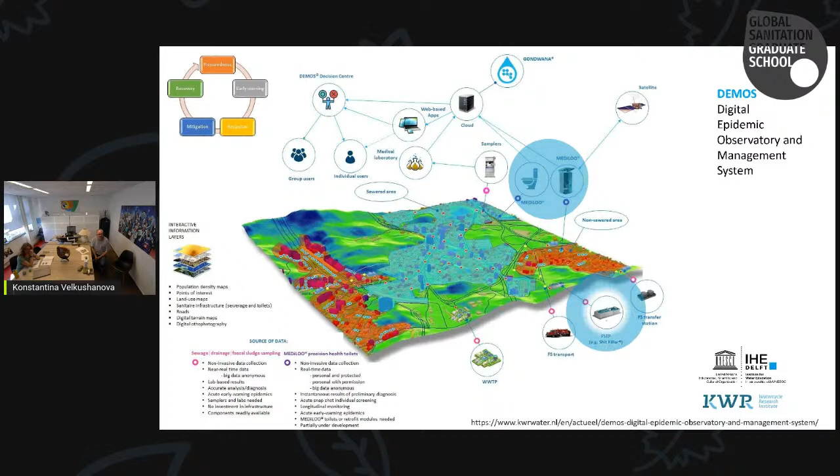So what is the future? If we want to really go to true citywide inclusive sanitation modeling, we need to learn and take knowledge from the sewered systems. We need to develop non-sewered sanitation models. And if we talk really about citywide inclusive sanitation, it's not only about technical models, it's also about other models, including financial models, but also social models. When we put that all together in the future, that's what we will call really a citywide inclusive sanitation model.

And we need to combine these models, we need to provide these interfaces, and we need to simplify it so that the complex models can run in the background and the users can see only the shell and get whatever the user wants to get from it.

So the future is that it will not be a privilege only of academic people doing the modeling. It will be done by lots of professional people. And what I expect is that there will also be business opportunities, companies doing modeling as vendors for us, so that we can ask them to do studies for us, and not all of us have to be modelers to be able to use modeling as a tool for modern champions in developing and implementing sanitation.